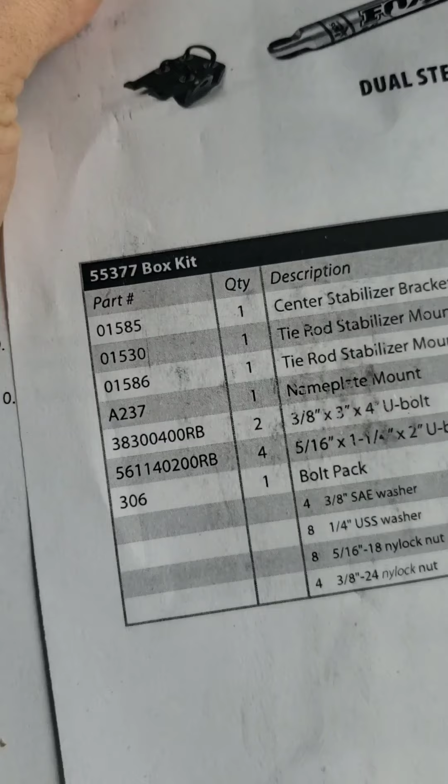Oh, there's instructions. We got our hardware here and some U-bolts, and two more paper wrapped packages and suspension. There we go. We got the part number here. It's the 55377 box kit, dual steering stabilizer, Dodge 1500 2500, 1994 to 2001, 55377, just for it again.

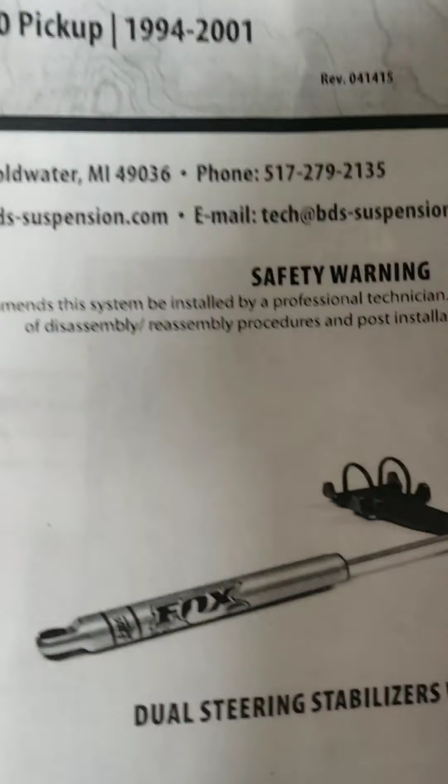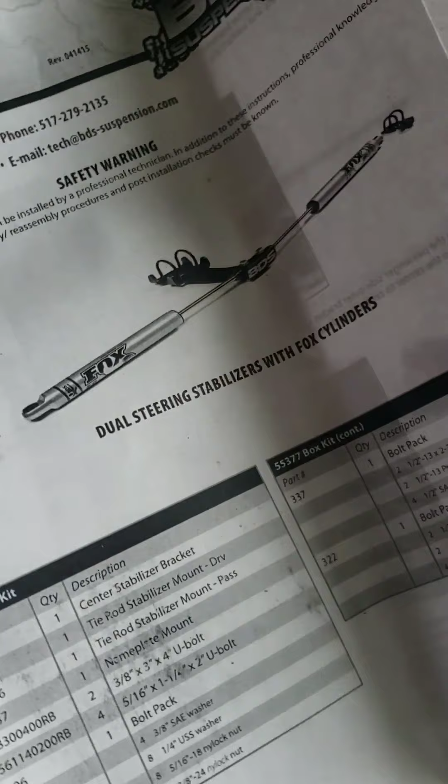Got phone numbers and stuff there for BDS, safety warning with Fox cylinders. It does not come with Fox cylinders. I don't know if that's just how it came, the guy ordered it from, but so we got bolt packs there, and that's the main lineup of stuff there.

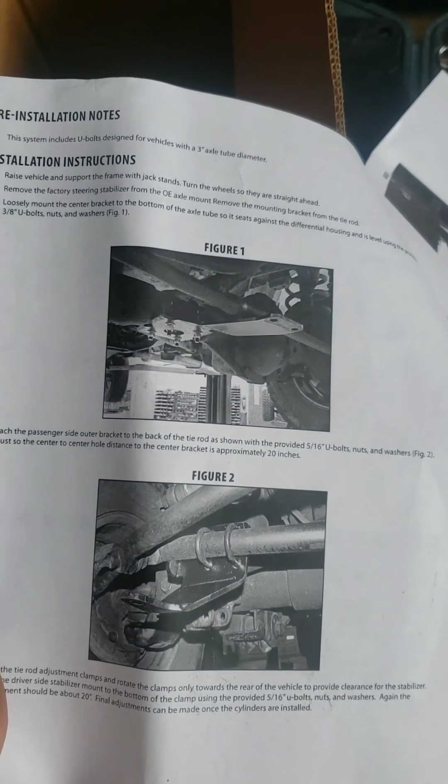So let's flip over the second page here, see what we're looking at here. Okay, I see how this works then. Okay, so we're going to be clamping this big piece here to the underside of the axle, and then the shocks are mounting to this, is what I think we're looking at here.

We have a sticker. That looks like, if I had a Chevy truck, I'd put that on. I'd put that right on the Chevy logo, but I don't think I'm going to use that one. Maybe some better stickers come in the shocks there. BDS does have some really nice stickers that I would like to use on the truck, but I don't like this one, so we'll just set that up here underneath some tools so it doesn't move.

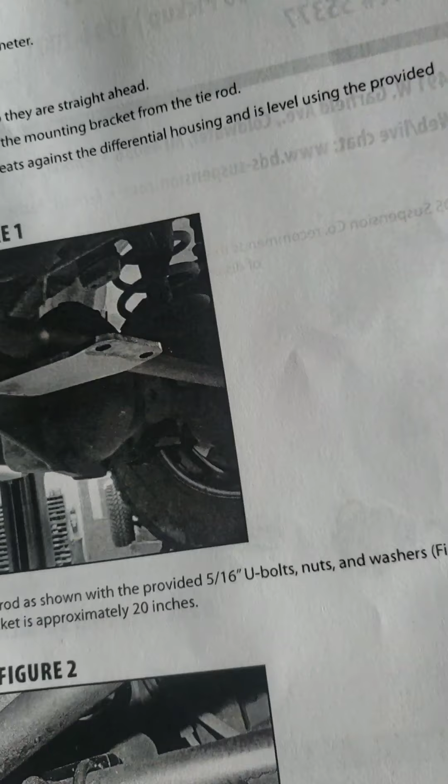Okay, so step one is just strip the factory steering dampener, steering stabilizer, the unit and the brackets off, and then mount on this bigger plate here. Then use the provided U-bolts to put it on. So I guess I'll get to work on that and check in a little bit.

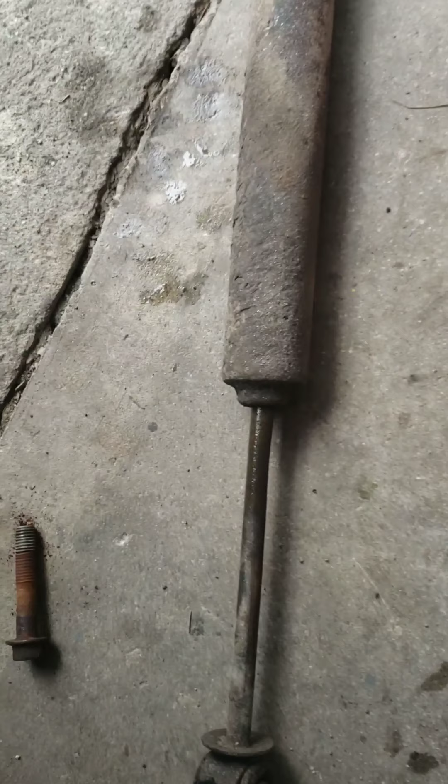So we got it out now. I had to torch the nut on this bolt. The bolt is still warm. The nut's, I don't know, it's under here somewhere. I had to use an impact gun after I torched it to get it out. But here's the old one, super responsive. This will fix many issues. Yeah, I can literally just push it and pull it back. That's how it's shot. Yeah, it's garbage.

So the bolts, I don't think I need them. I'm going to keep them, but I don't know if I'm going to need them.

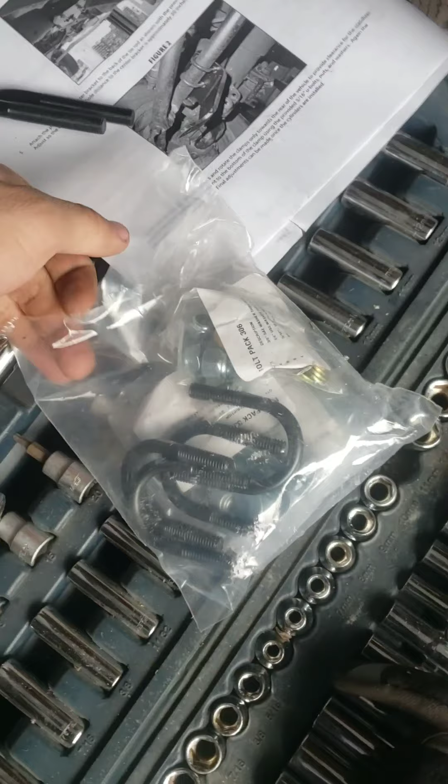So, time to cut open the first baggie. There we go. So pretty sure we need these big U-bolts, and then probably a bunch of these little guys here. Got some smaller U-bolts here, and some other nuts and bolts that'll probably be to mount up the rest of the hardware.

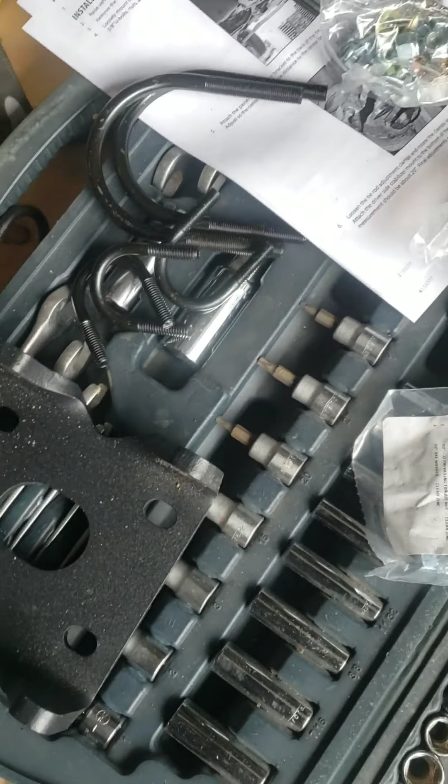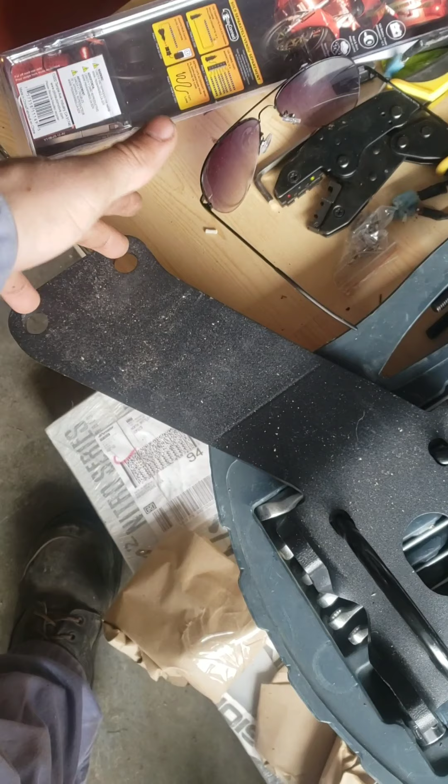The big ones will come with the axle in between, right in there, right there. There's a spot on the axle that clearly BDS has taken advantage of to use, because it's a little bit narrower and it's pretty much right in the center. So that's why there's this funny little angle in it, to put it right in the center, so you won't have the left side and the right side shock mixed up.

You can just grab both of them, put on the mounts, which are going to be these baggies, these little paper wrapped packages, and then you're good to go. So I'm going to mount up this, and I'll be back in a little bit.

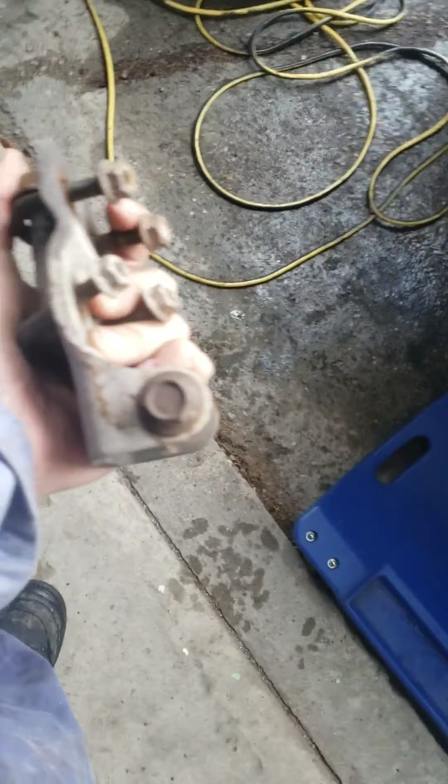Alright, so I now have the other bracket mounted. I've got, this is the original bracket here. I'm just keeping all the parts, as you should too. If you ever swap back or sell the truck or total off the truck, you can just put this garbage back on.

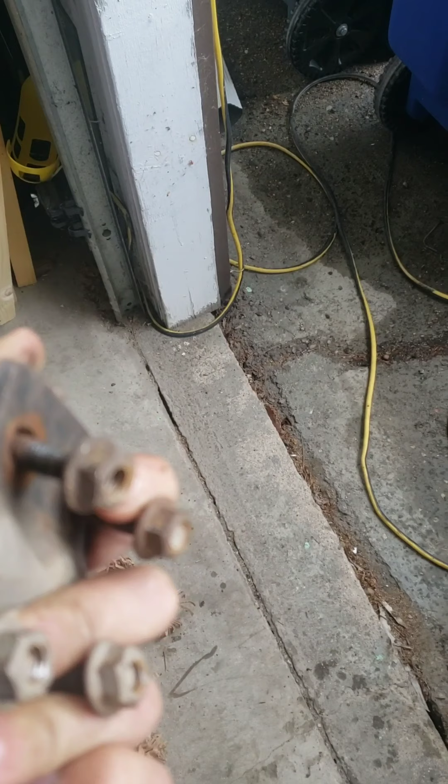Keep your nice expensive stuff, and you can put it on your next truck if it'll fit, or just sell it and get some of your $400 back, which is pretty much what this kit costs with the BDS shocks. You can find them cheaper, but $400 is what I dished out for it. So I've got that bracket up here, and I'll roll underneath here on my creeper.

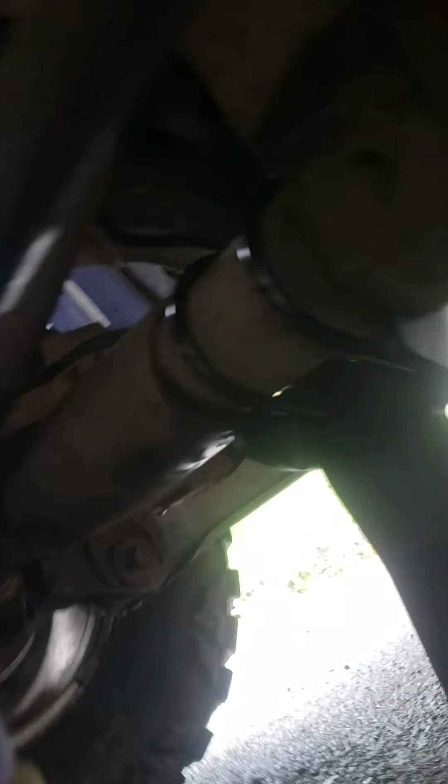So I've got this guy here, sits right inside this little trough. It's got nylon lock nuts, grade 5, with the grade 8 washer underneath. I'm not sure what grade the U-bolts are, but they're probably pretty beefy. So this goes like this, and it says to have them loose.

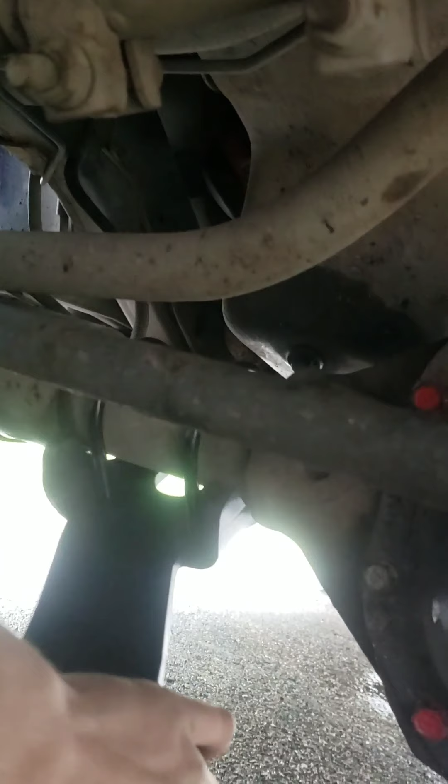I'm gonna grab a wrench here and just tighten it up a little bit so it stops, because I can just move this with my hand, and when I let go, it swings down. It's not like I'm putting it there, it just swings there. So I'm just gonna grab a wrench.

So what's it gonna be this time? 15 maybe? Yeah, we'll try a 15. Stick that on the wrench here.

Running camera and doing this isn't the funnest thing to do, which is why I don't have a tripod or anything to mount my phone onto.

So here's a real trick. Take your leg, put it up underneath here, and your hand under here. And looky there, we were right.

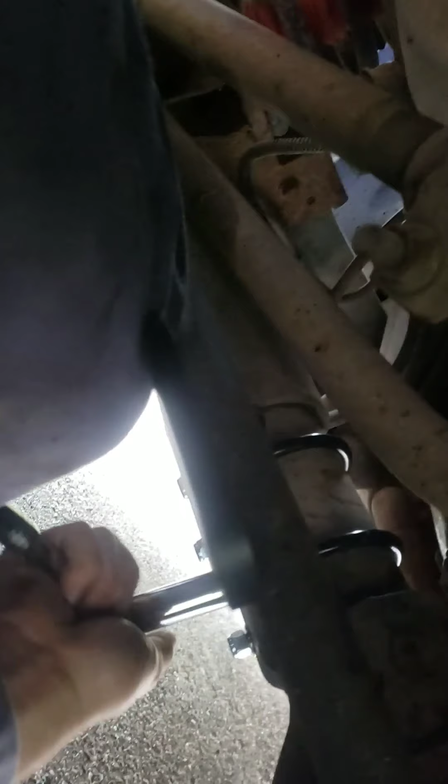Just helps if I spun it the right direction. Come on, there we go. Let's keep going now. Helps my wrench was going the right direction too, I guess. There we go.

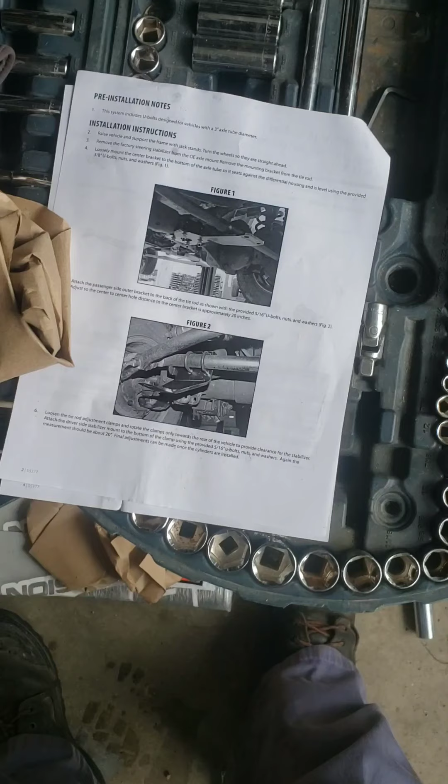So yeah, I'm just gonna get to the point here. I'm just gonna set the camera down and finish. Okay, sweet, so I got that all snugged up.

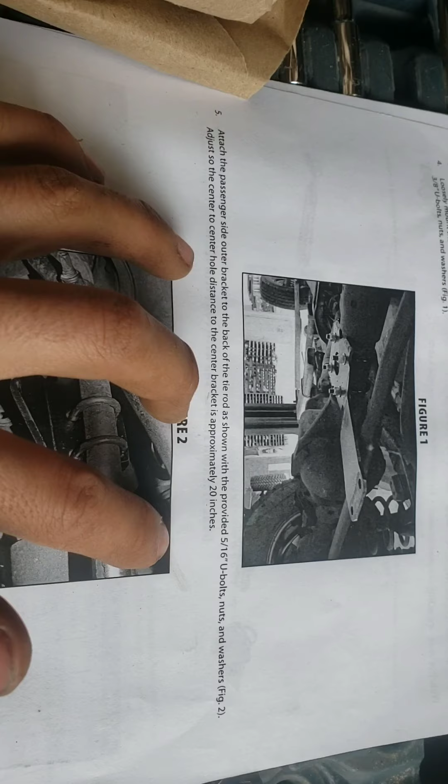Now it says the passenger side bracket to the back of the tie rod is shown, provided with 5/16 U-bolts, nuts, and washers. Just the center to center hole distance on the bracket is approximately 20 inches.

So I'm hoping it's going to be this baggie here, the biggest of them. Lots of paper on these. There, yeah, it's this guy right here.

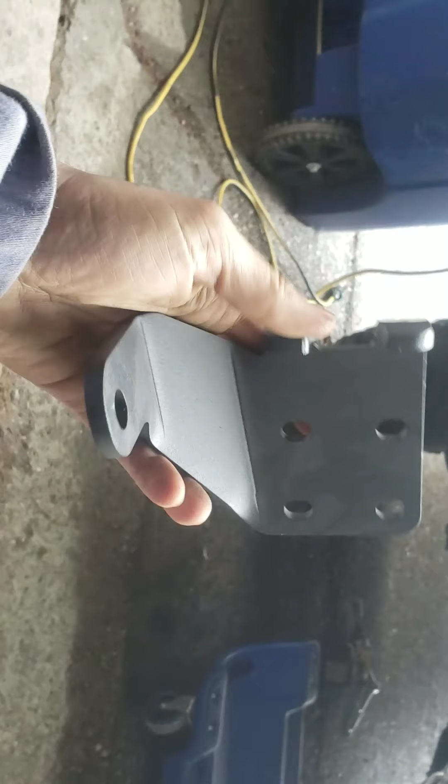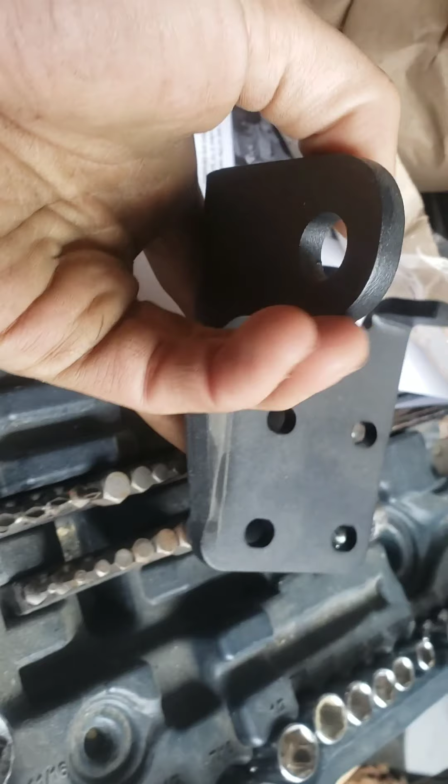So this will mount up like this underneath the truck, and you've got to measure so that this hole and the hole on the actual bracket are 20 inches apart. So I'll get this all snugged up, and hopefully this is audible over the radio in the background.

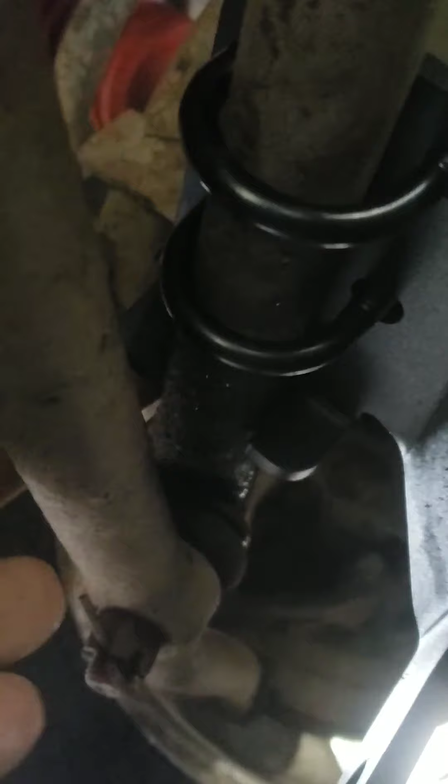Okay, so we got this bracket here. It's still loose. There's these two little feet here, you can see them right here. You got to make sure these are over this bar. Then you got the U-bolts, and then you got the washers and nuts.

Over there, 13 mil. Gonna have to grab, measure, make sure it's 20 inches from here to here. I'll just wiggle it - you can wiggle it over to be wherever it needs to be. So we've got that all set.

Got this piece here all tightened up underneath the truck. This guy here is kind of lined up.

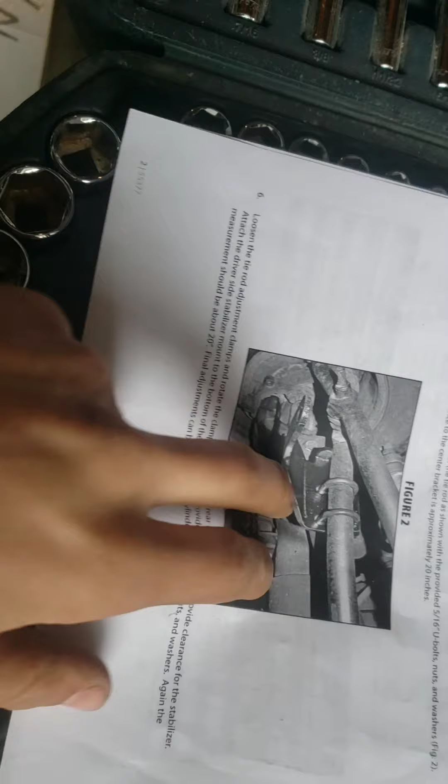Loosen tie rod adjustment clamps and rotate the clamps only towards the rear of the vehicle, providing clearance for the stabilizer attachment. Providing clearance for the stabilizer.

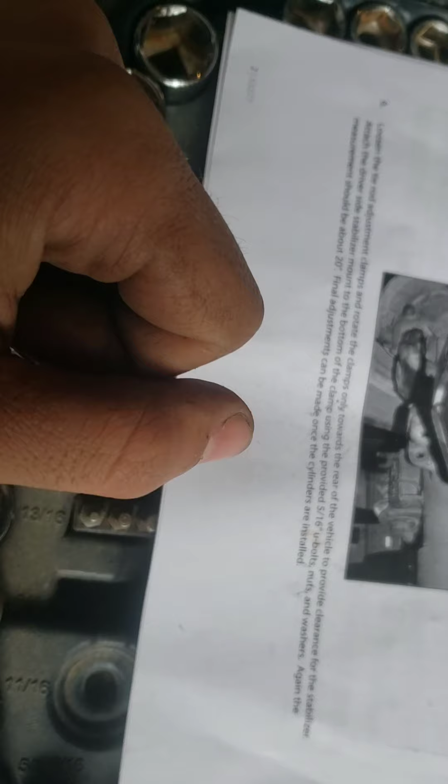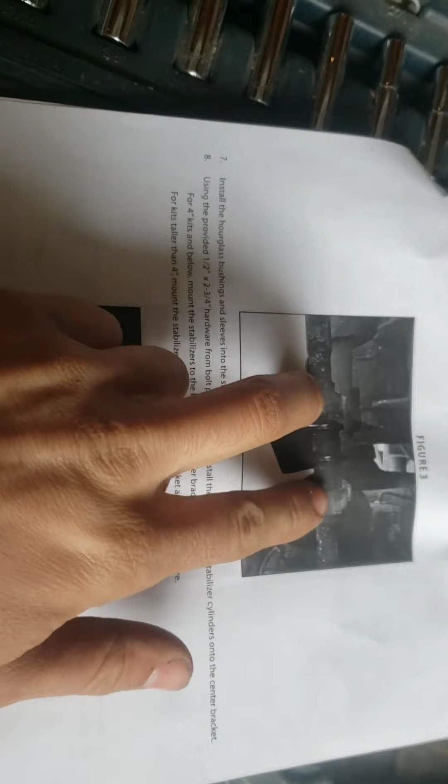Attach the driver's side stabilizer mount to the bottom of the clamp using the provided 5/16 U-bolts. Okay, so now we're coming over here, and there will be a nice little gap in these arms where we're putting, I don't know, probably this piece? Let's see - see if I can rip it open one-handed.

I see black metal - that doesn't mean a whole lot. This here is the front BDS decorative piece that is shown right there, and it is nice and shiny and showy and BDS.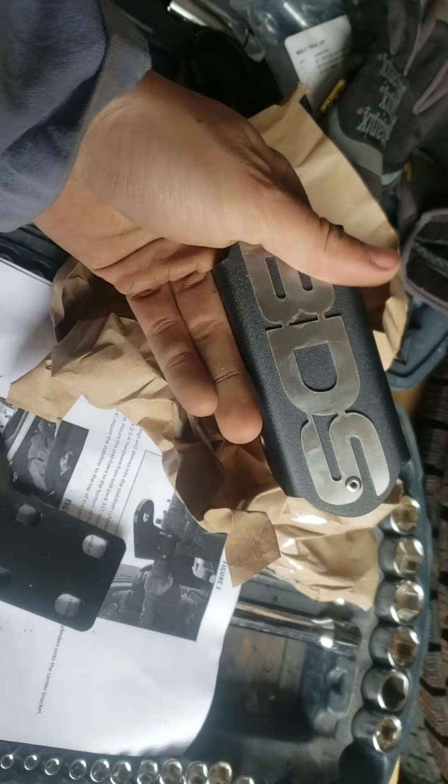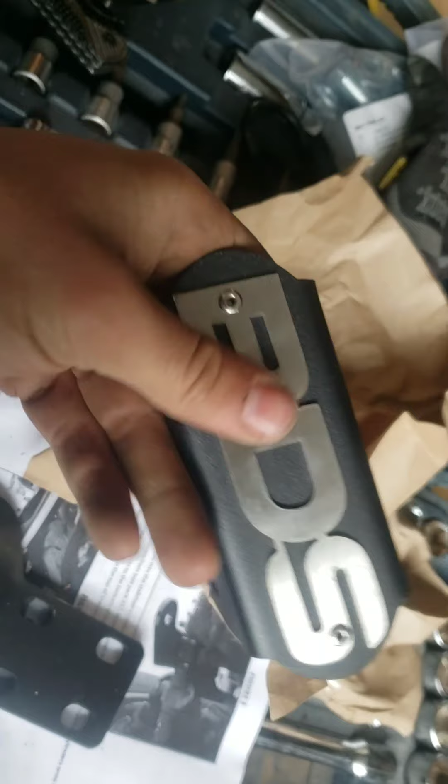These might get painted a different color. I don't know how I'm going to do that, but I kind of want to paint them a different color. That looks like a lot of taping though. But yeah, they might get painted red or something, to really pop with that silver in behind there.

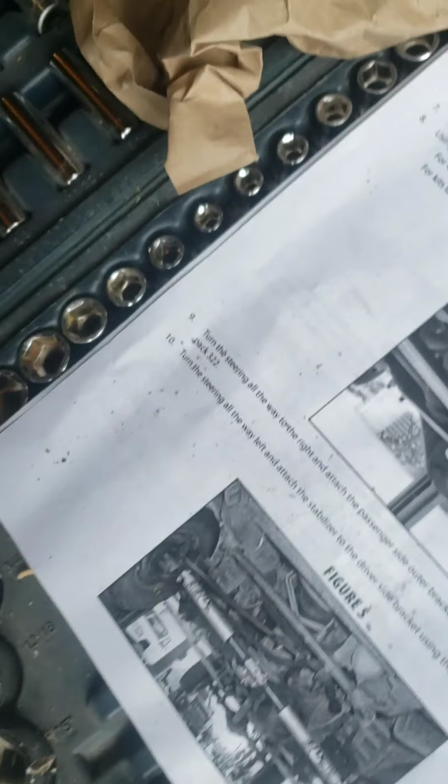Alright, so that guy's on. Hourglass bushing.

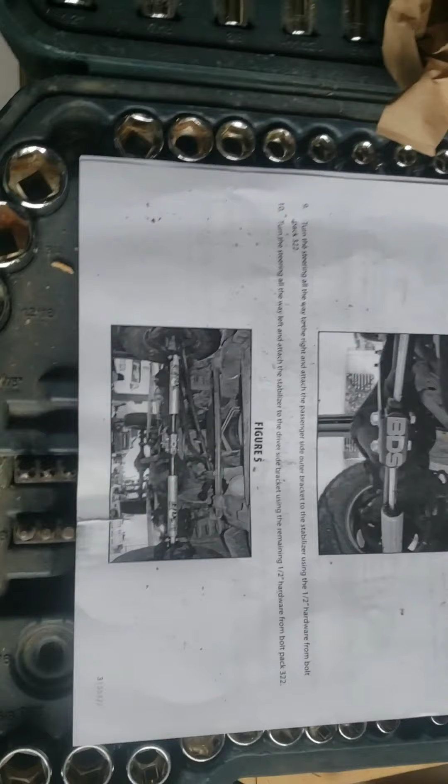Okay, so now we're working with the cylinders, so now it's time for the fancy stuff here. I have not - first time we're all seeing this.

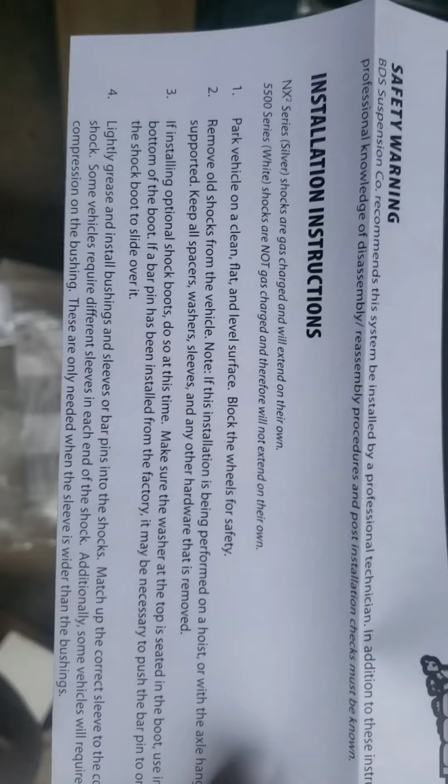Remove old shock. There'll be periods of rain throughout the day. For tonight, cloudy with a 60% chance of rain. I guess there's a sticker here which we'll be putting on. For tomorrow, cloudy with 40% chance of rain throughout the day. For news, sports, and weather at any time, stay with Battleford Now and MeadowLakeNow.com.

From Saskatchewan country, CJNX.

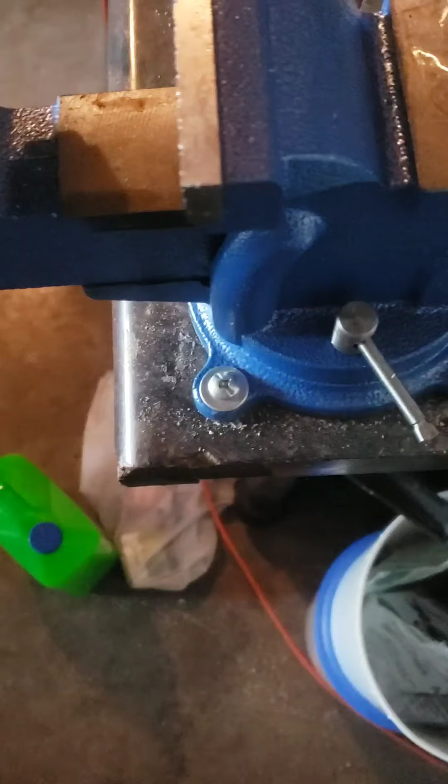So here's the hourglass bushings, these little steel sleeves. The easiest way to push these in is using a vise. I've got this bushing here, I just slip the baggie over it. How I do it is I keep this baggie over it just for added protection. And then I take the bushing and get it half started in there.

And then with the vise open, drop this sucker in and start squishing it in. That's not going in straight. But so you kind of got to grab that there.

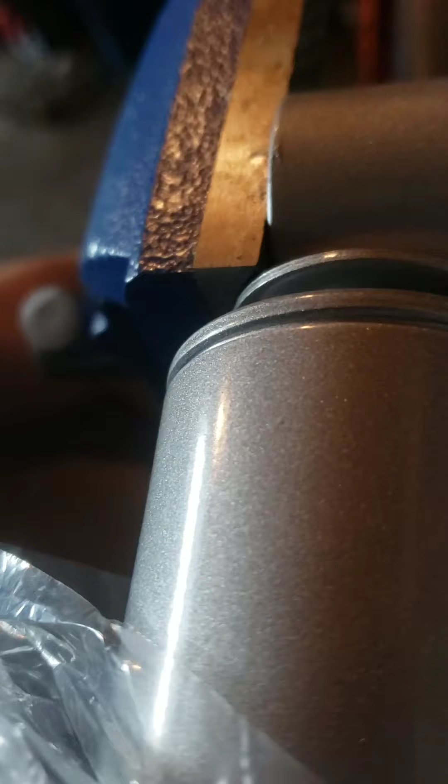So here I might have to redo this one. Yeah, I'm gonna have to redo this one. But you kind of get the point here, just squish it in the vise. There we go. So then after you've got the bushing in, you just put in the little steel pin, and again you just stick it in the vise, squish it down, and you're good to go.

Excuse the background noise there, cutting holes in my street. I've already got one done wherever I set it. That's concerning now. These are expensive, but it'll be around here somewhere. That's weird. That's really weird, I doubt it rolled away on me. But yeah, so I'll just take these and put the pins in and install them, then I'm done.

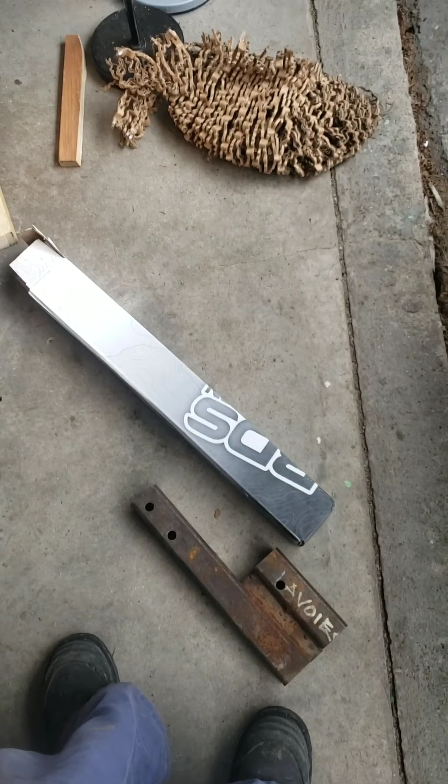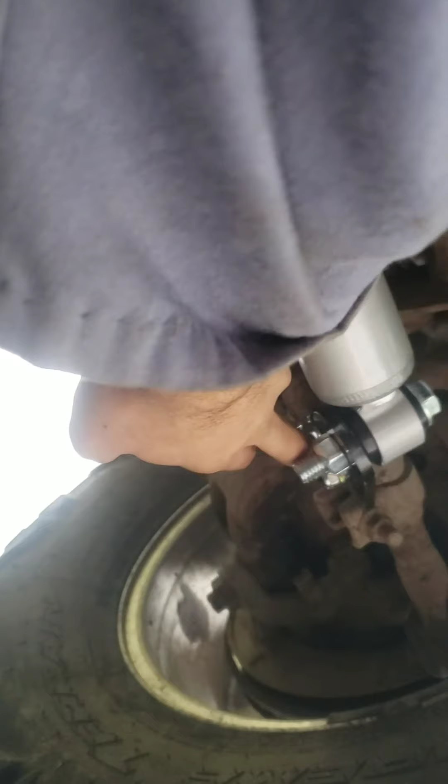Alright, there we go, so I have it all tightened up. Torque spec on these big half inch is 50 foot-pounds - oh, it says it all in the instructions. And then these guys back here are 30 foot-pounds. Then both these end link mounts, all the bolts to those were 20 foot-pounds. So it's nothing crazy.

But yeah, I'm gonna get a smaller wrench to do that, just because my great big half inch drive, 26 inch or whatever, is a little bit too beefy for doing these, and I also need a 3/4 inch wrench and possibly a second hand to have someone holding the wrench while I run the torque wrench on these bottom ones. I did manage to get them mostly tight, I've probably got them to about 45 right now. We're pretty close, so it's all close enough.

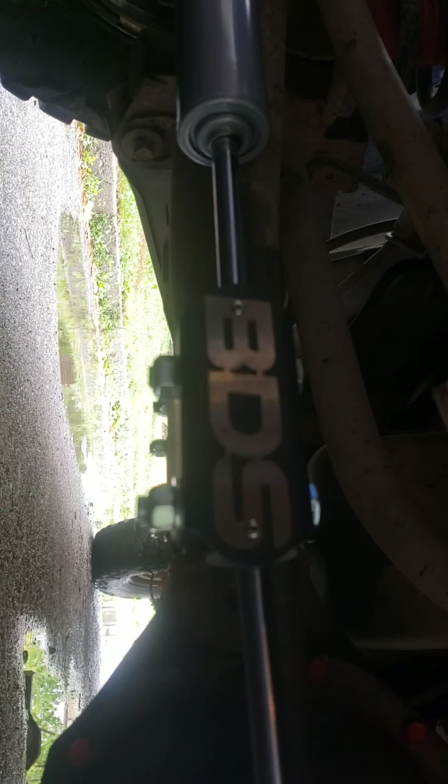Those there are all buttoned up. But yeah, so that's that. It's easy to do. It took me, I'm looking about 2 hours with videoing, so you can do it in - if you're really working at it, you can probably do it in an hour and a half. Realistically, you could do this in an hour and a half.

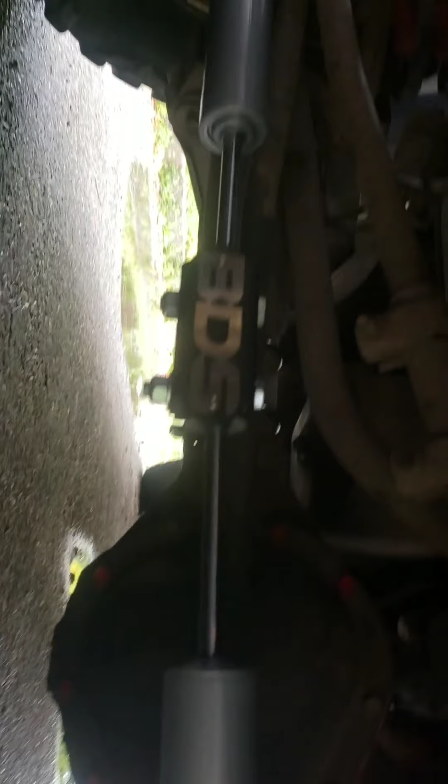It's really simple to do. Biggest part was just removing the old rusted out parts. That took a bit, but once that's done, yeah.

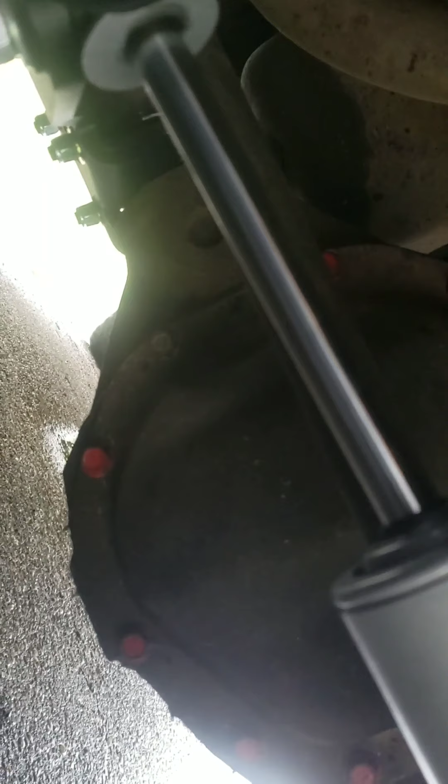And you do actually leave this factory mounting bracket down here because it's welded on. If you want to cut it off, you can cut it off, but it's not really gonna change anything, it's not gonna interfere, because it used to run from here up to here, but now it runs mounting to the right to the axle, then here and here. So this is solid, these will move with steering, and yeah, I don't know why they wouldn't have.

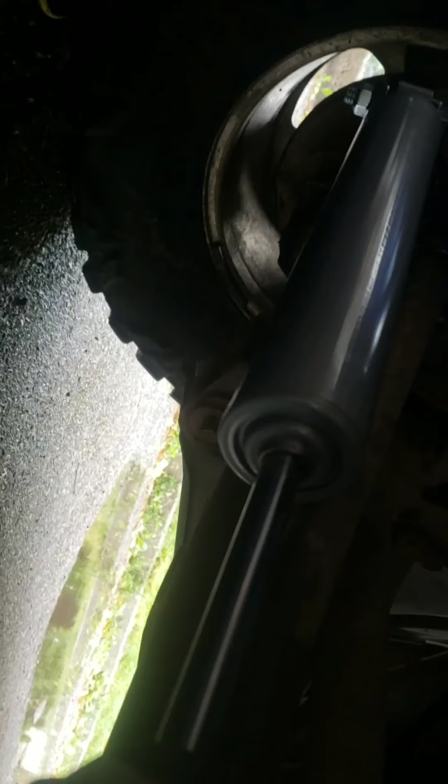Yeah, but this is how it's set up. So because this here used to be your solid mount, then this was the moving mount, but they moved it to this being your solid mount and these being the moving mounts. So it's similar, it's a little different, but it's similar to the factory setup.

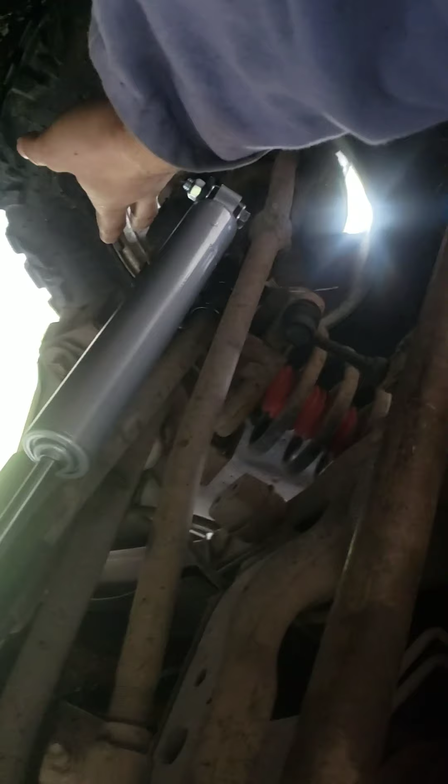You are actually supposed to mount these parts on the bottom for a 4-inch lift and under, but I want them up top for when I go off-roading, just to help keep them safe. I might build like an arm to come up around and then up to here, just to help, and then a bar all the way across, and then the same thing on the other side, just a little U, then maybe something. I don't think I'm going to be able to do anything here with this cross member underneath the engine, but yeah, so that's that.

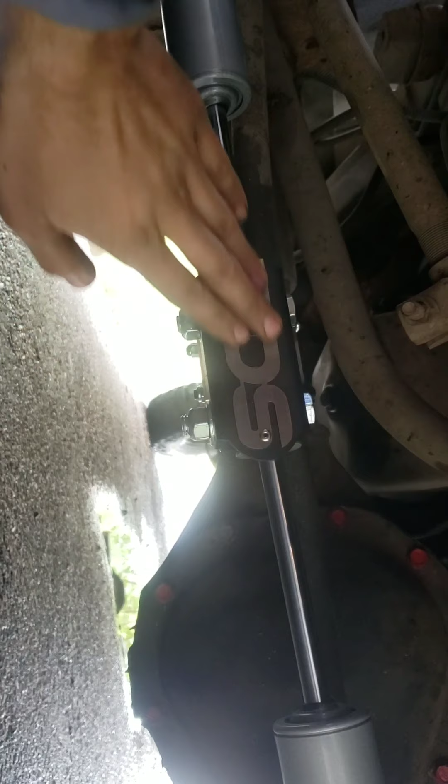That's just future stuff that, I don't know, we'll see. And I've got stickers to put on shock absorbers, I'll wait and do those tomorrow maybe, hopefully they'll be dry. And then at some point I do want to take and spray paint this red, make it nice and shiny and make it pop.